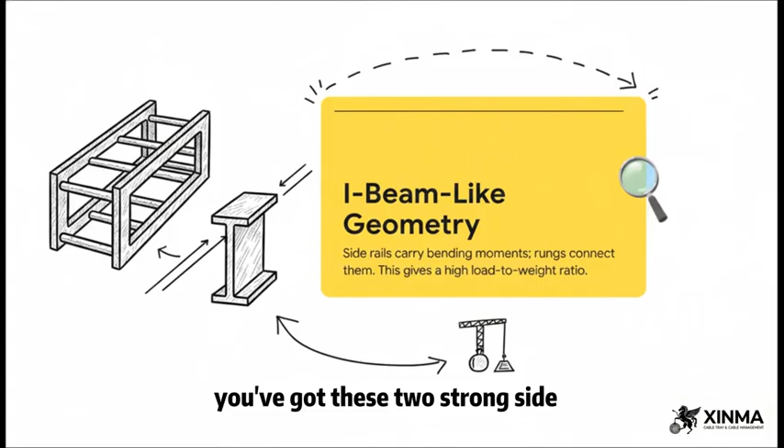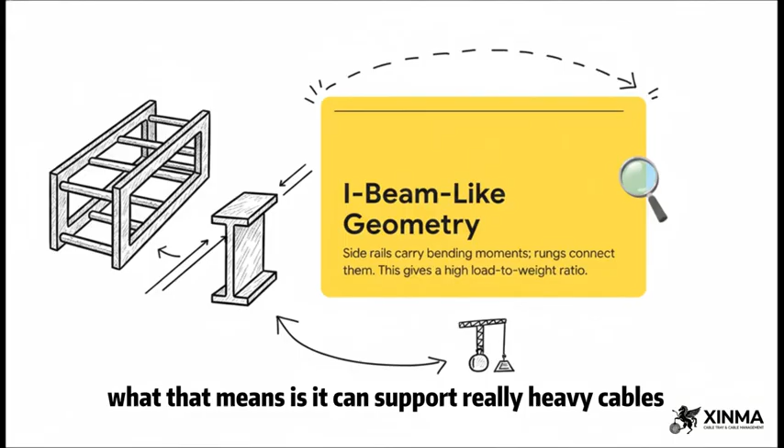You've got these two strong side rails that do all the heavy lifting, handling the main bending forces. Then you have the rungs connecting them. This whole setup works almost exactly like a structural I-beam you'd find in a skyscraper, giving it this amazing load-to-weight ratio. That means it can support really heavy cables over long distances without being super heavy itself.

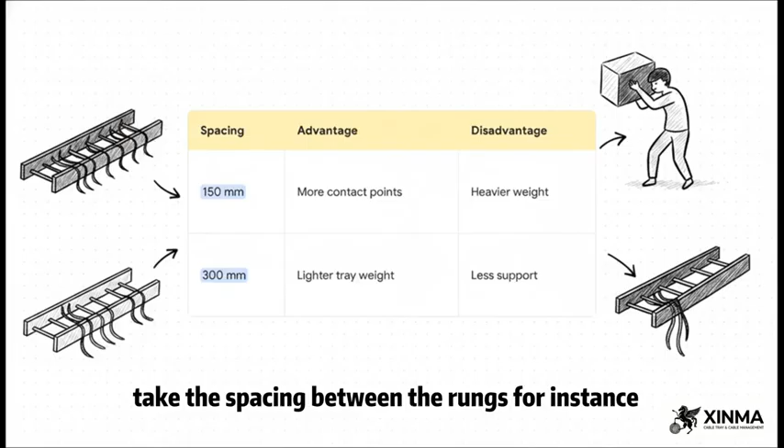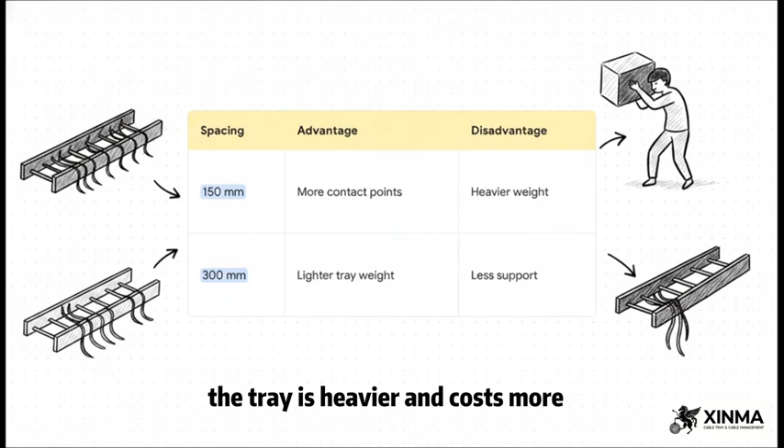But even with that fantastic basic design, there are some important choices to make. Take the spacing between the rungs, for instance. If you go with a tighter 150mm spacing, you get way more contact points, perfect for supporting smaller cables, but the tray is heavier and costs more. On the flip side, widen that spacing to 300mm and your tray is lighter and cheaper, but you give up some of that support. It's a classic engineering compromise.

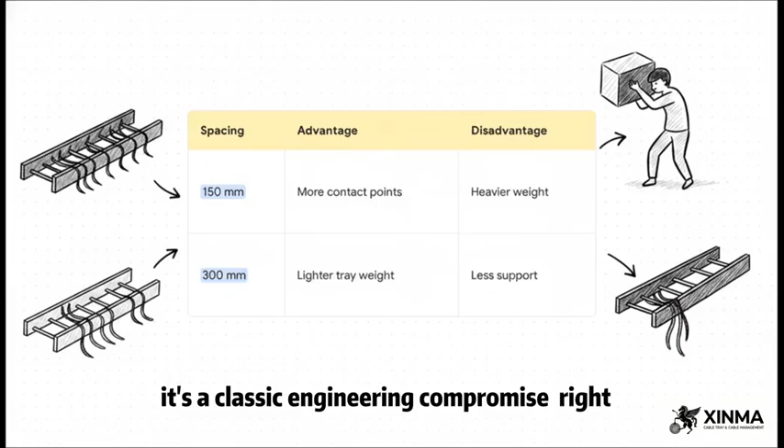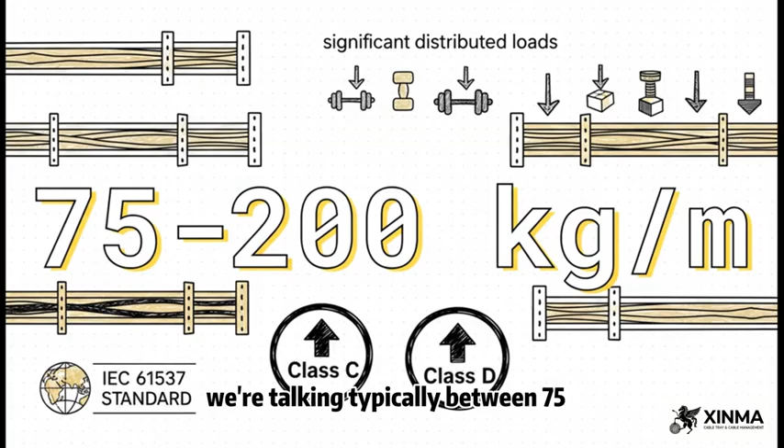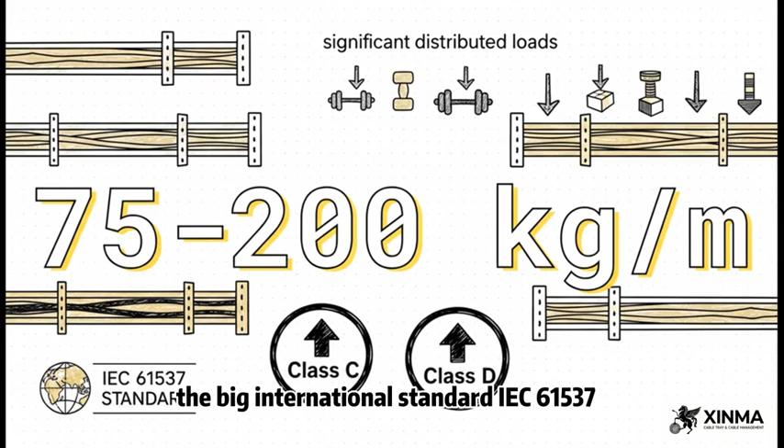And what's the result of all that smart geometry? It's the ability to handle some serious distributed loads, typically between 75 and 200 kilograms per meter. That kind of performance puts these trays firmly into the heavy-duty Class C and D categories, according to the international standard IEC 61537. Okay, so geometry is one half of the equation, but what about the other half?

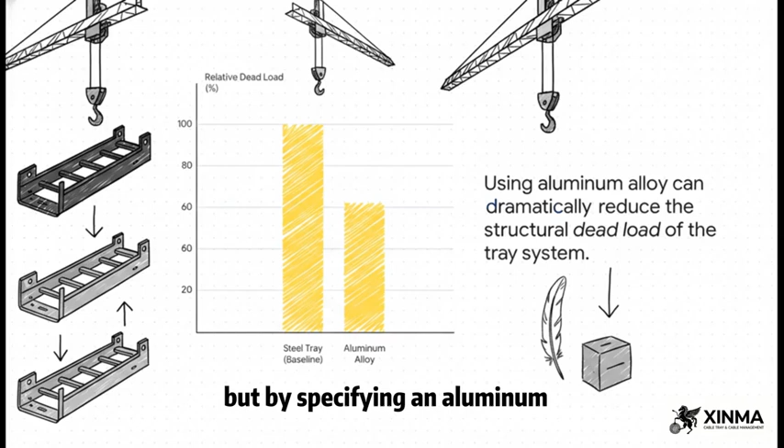The next huge engineering decision is the material itself. This is another one of those calculated trade-offs between strength, weight, and the environment it's going into, especially critical for overhead installations, where every single kilogram counts. Now steel is strong, and it's common, for sure, but by specifying an aluminum alloy like 6063T5, you can slash the structural dead load, that's just the weight of the tray system itself. And as you can see from this chart, the reduction is pretty dramatic.

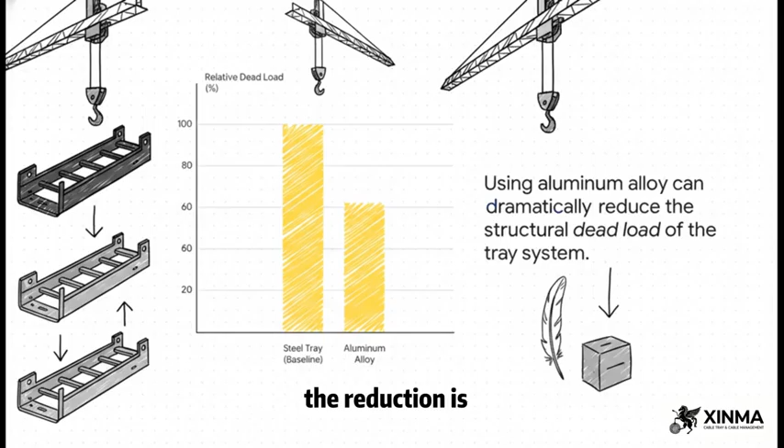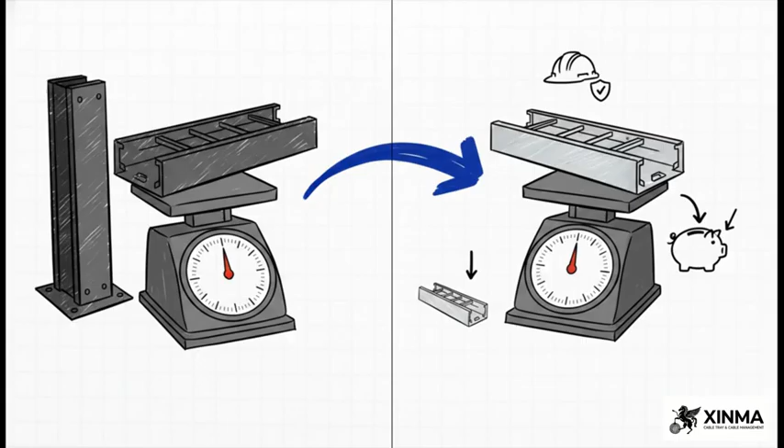So just let that sink in for a second. Making a deliberate choice in material can cut the tray's own weight by 35 to 40%. That has massive knock-on effects for everything: the support structures you need, the safety of the installation, and of course, the total cost of the project.

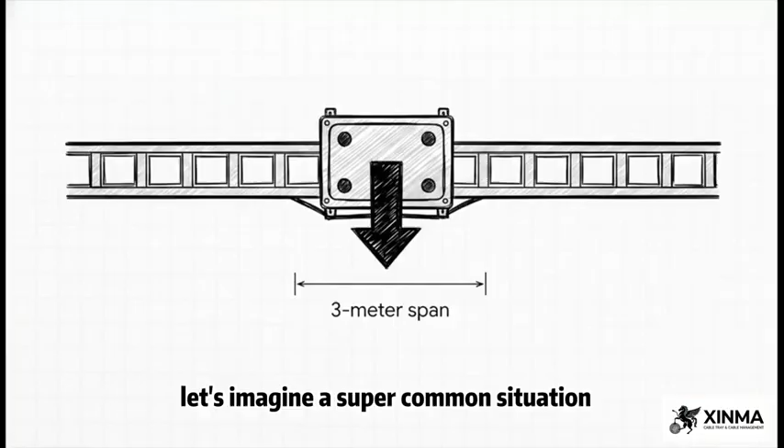All right, we've talked about those nice, clean, uniform loads you see in the spec sheets, but let's be honest, the real world is a lot messier. What happens when you have to mount a heavy piece of equipment right onto the tray? Let's see how the theory actually translates to practice. Let's imagine a super common situation: an installer has a 60-kilogram junction box, and they need to mount it smack in the middle of a 3-meter span of cable tray.

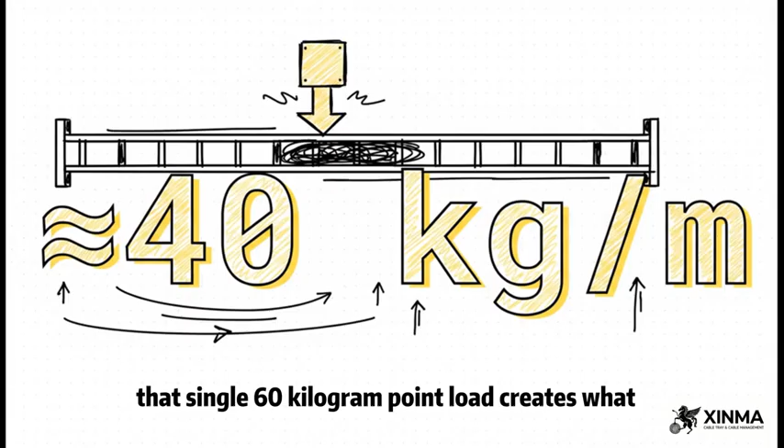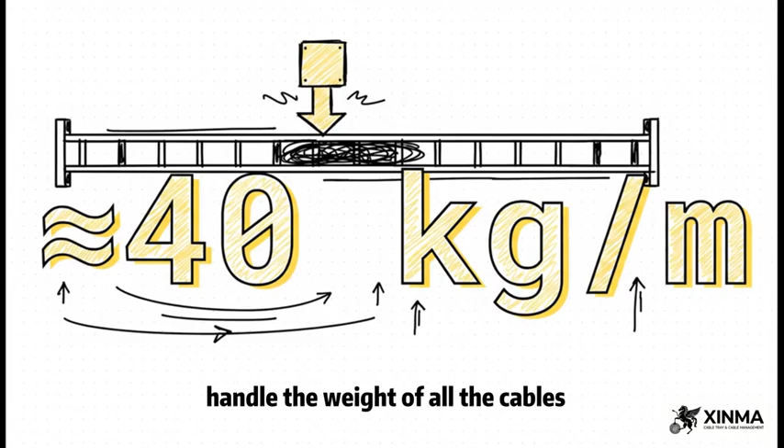So here is the big engineering puzzle: how does that one single concentrated weight affect the tray's overall load rating? You can't just pretend it's not there, it has to be accounted for. And the answer is actually fascinating. That single 60-kilogram point load creates what we call an equivalent bending load of about 40 kilograms per meter across that whole span. This is so important. It means the tray has to be specified to handle the weight of all the cables plus this extra 40 kilograms per meter from that one junction box.

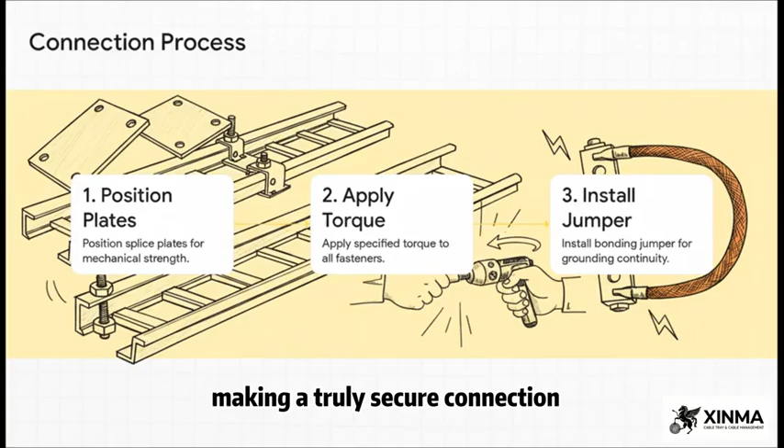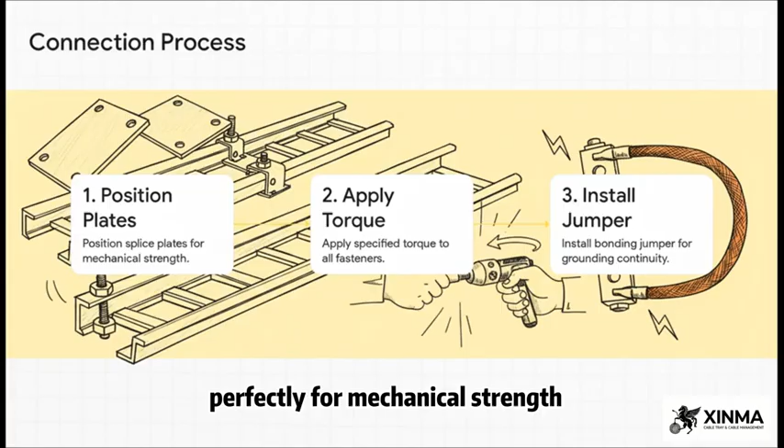A cable tray system can be incredibly strong, but it's only as strong as its weakest link. That's why the connections, the joints between the individual sections, are one of the most critical parts of the entire setup. Making a truly secure connection is a very precise process. It's not just about slapping two pieces of metal together and cranking on a bolt. You have to position the splice plates perfectly for mechanical strength, then apply the exact right amount of torque to the fasteners, and finally install a bonding jumper to make sure you have solid electrical grounding across that joint.

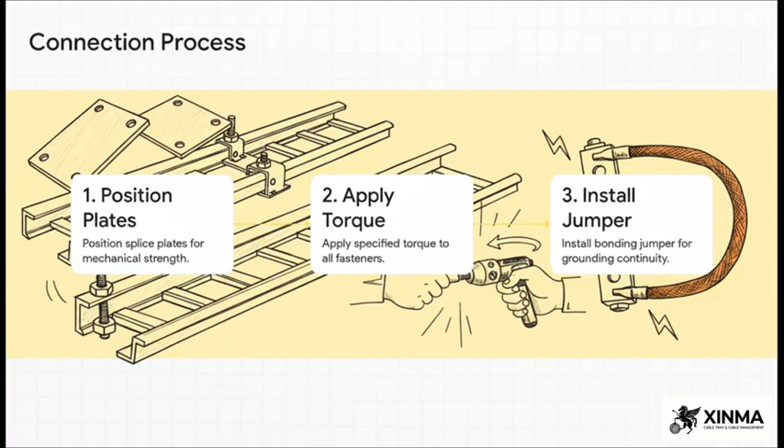And these specs are absolutely 100% non-negotiable. A torque of 20 to 25 Newton meters isn't just a suggestion, it is a hard engineering requirement to guarantee the mechanical strength of the whole run. And that bonding jumper, it's not optional, it's absolutely essential for safety and for the system to perform the way it was designed.

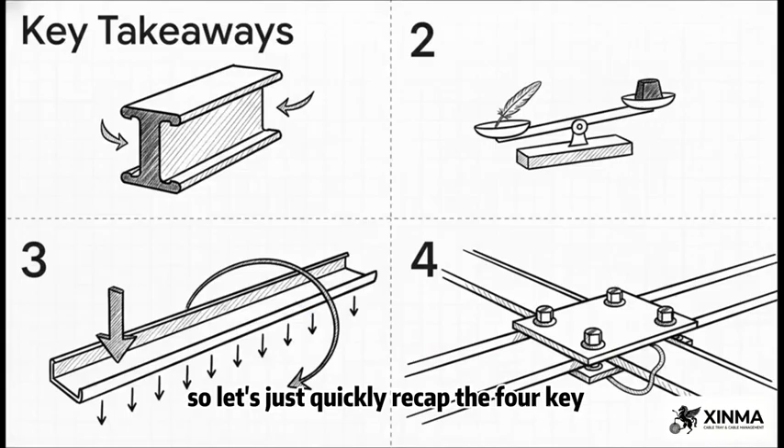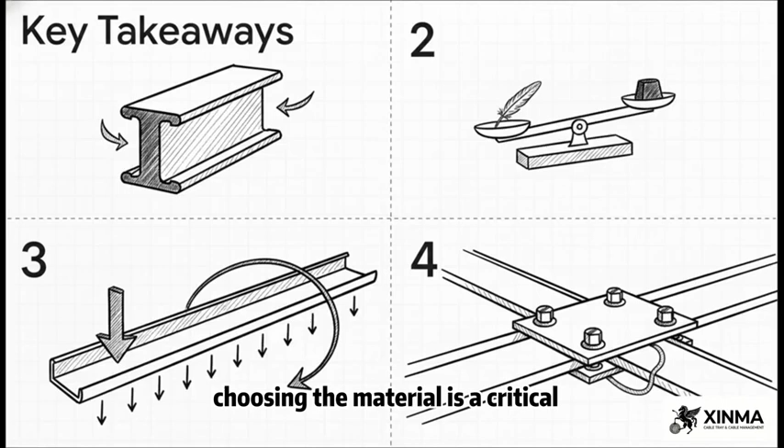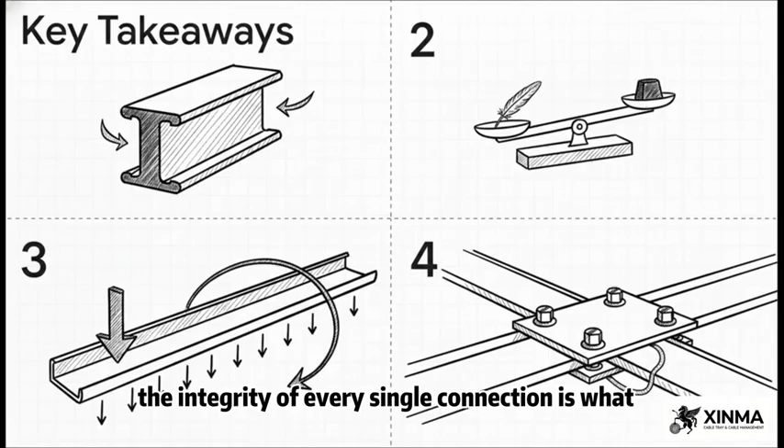So let's just quickly recap the 4 key engineering pillars we've just walked through. First, that I-beam geometry is where the tray gets its built-in strength. Second, choosing the material is a critical calculation of weight versus strength. Third, those pesky point loads have to be converted into their equivalent distributed load. And finally, number 4, the integrity of every single connection is what determines how the entire system performs.

Which really just leaves us with one final thought to chew on. When you look at a set of plans, yeah, the cable routing might be specified. But after digging into all these details, it really makes you ask the question: is it truly engineered?